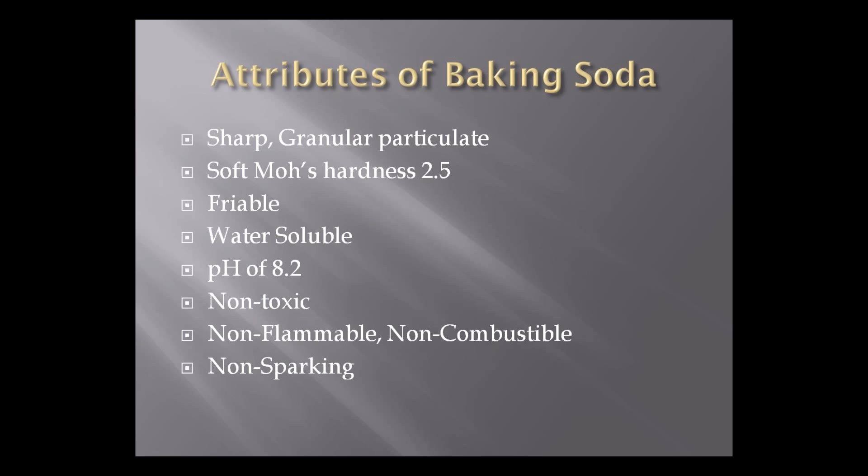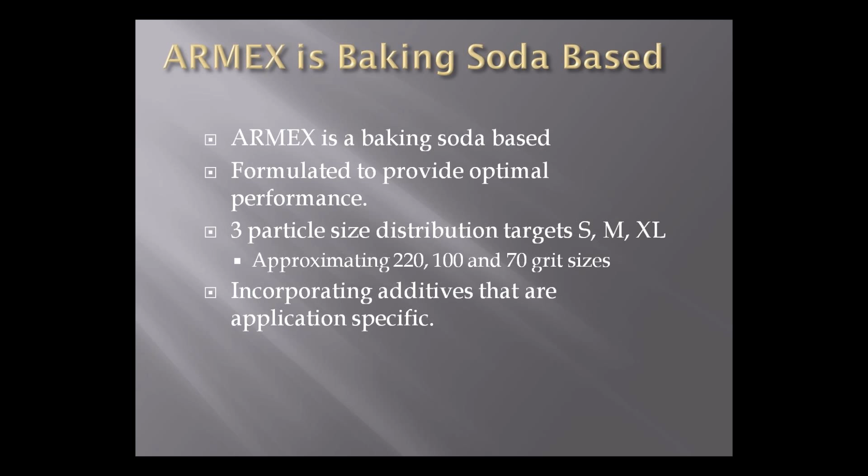We've taken this wonderfully natural particulate and enhanced it for performance as a cleaning and coating removal abrasive, being used in either a compressed air or a water delivery system. So Armex is baking soda. It's chemically very similar to the product that you find in the little yellow box, Arm & Hammer baking soda, in a supermarket. But because we are relying on its physical properties more so than its chemical properties, we have a tighter specification on particle size distribution, and we've added other ingredients to optimize its natural properties for specific applications.

All of our products have flow aids and moisture control aids. This minimizes any issues you would have with moisture during blasting. One flow aid makes the bicarbonate 2 times more resistant to moisture than regular baking soda, and the other makes it 8 times more resistant. We add other ingredients to improve rinsability and grease cutting. Our profile and turbine formulas are blended with a hard grit at 10%. This gives the abrasive just a little bit of tooth, but not to the point where you will see damage or distortion on the base material.

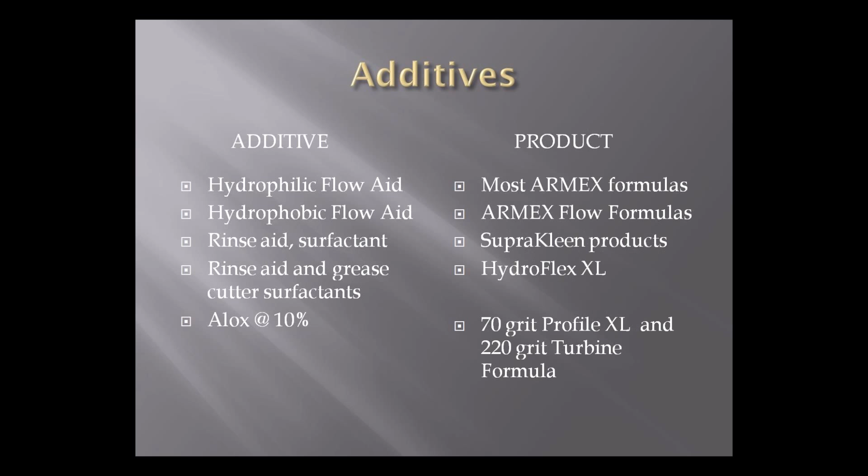Oops. Sorry about that.

The primary products of choice for the remanufacturers are Armex Maintenance XL product. This is a 270 micron or 70 grit abrasive with a hydrophilic flow aid, making it 2 times more resistant to moisture than regular baking soda. It's excellent for general cleaning and heavier paint removal. The Armex Maintenance formula is very much the same, except it's a slightly smaller particle, about 170 microns or 100 grit, and is best used on more gentle, sensitive substrates with thinner coatings.

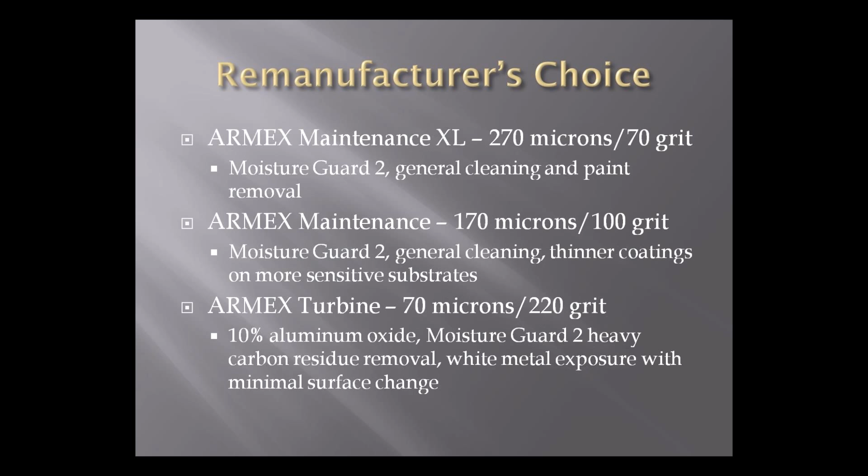The Armex turbine formula is a real departure from the rest of our formulations because it is blended with 10% aluminum oxide. It is a very, very fine grit, 70 microns or 220 grit, and it is excellent for removing heavy carbon residues and for exposing some white metal without surface damage. The hard abrasive allows for the deeper clean, but because it's only 10%, the soda actually cushions its impact, preserving the base metal, but still getting it very clean.

So now we've established that Armex is baking soda based, and as you can see here, in comparison to other abrasives, it is softer than most other grits available, and it is softer than most materials it would be used on.

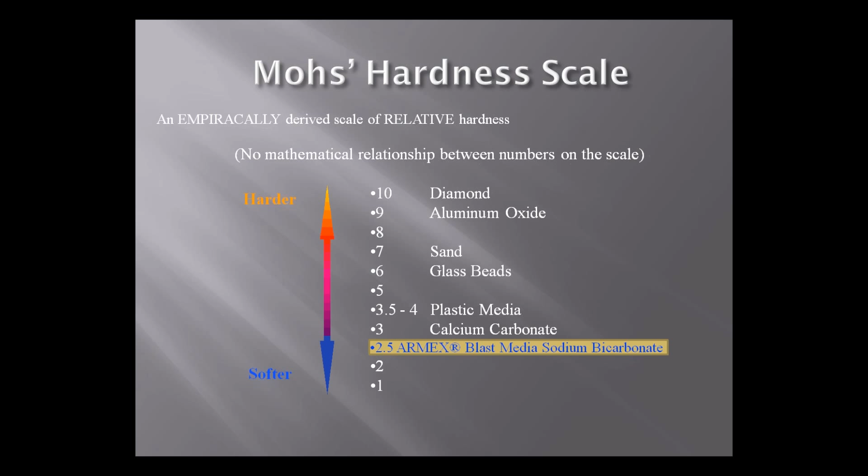How does it work? It is very soft, as we've established, and extremely friable, meaning that upon impact, it fractures into many more tiny particles. It is pulverized by the impact on the surface. Two phenomena result. The energy that is generated at this point is really the force that is removing the coating or contaminant, and then the particle is rendered to dust.

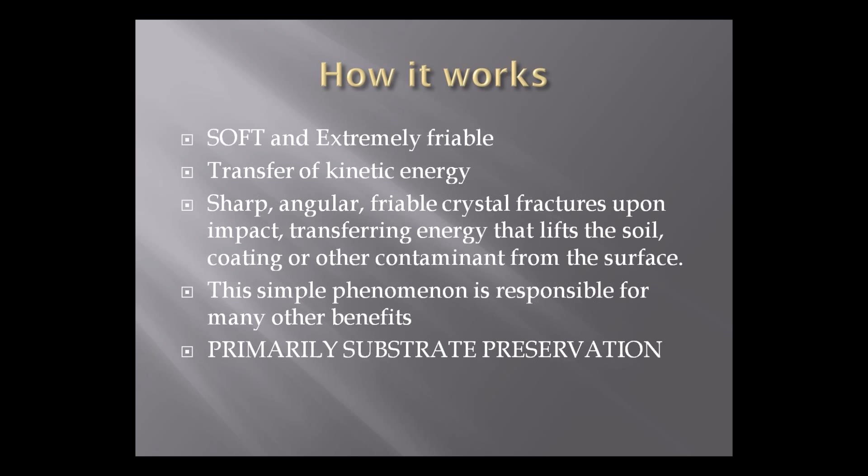This is one of the primary differences between Armex and other grits. Even grits considered friable like glass or plastic remain intact unless you're operating at pressures over 45 psi. We'll touch on that again later. Only then do they begin to fracture. Armex, on the other hand, fractures at even the lowest pressures, 5 or 10 psi. This is the key attribute that preserves the base material.

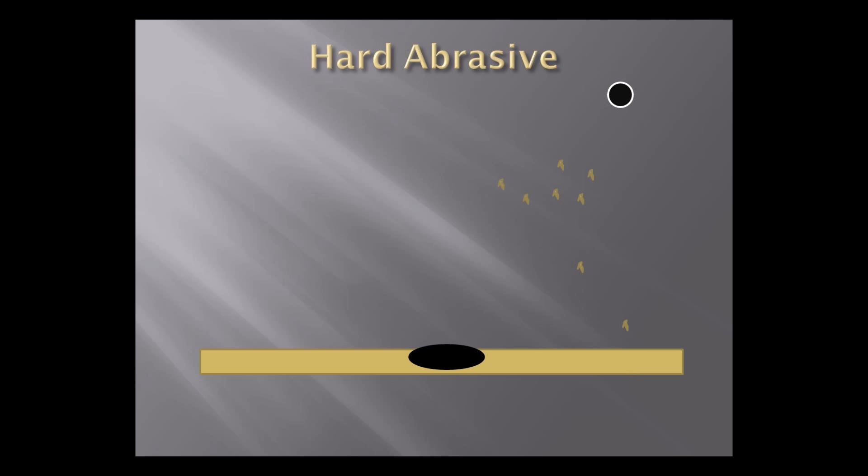In order to demonstrate the difference, let's take a look at this animation. The hard abrasive remains intact, strikes the surface, and removes the material, and may also remove the coating, and may also remove part of the base material. This might be as little as a scrape or a peen, but it could be as much as a pit. Armex, on the other hand, fractures upon impact, releasing all the energy, which removes the coating or contamination and leaves no damage to the base material.

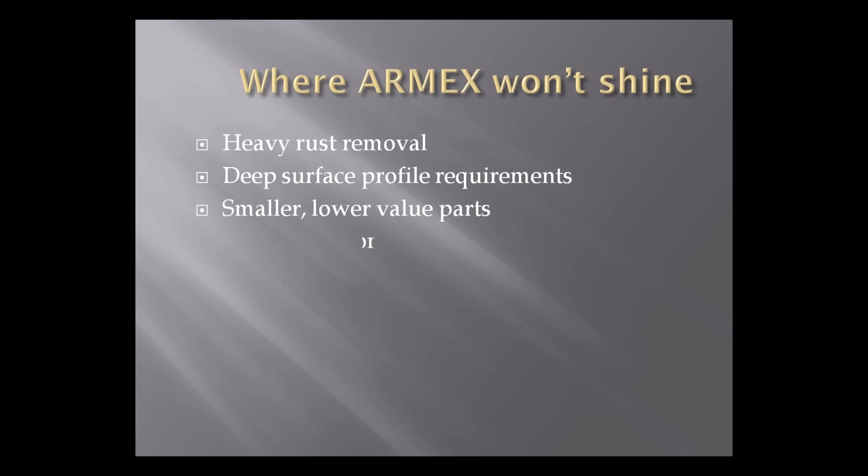Of course, there are some places where this would be a disadvantage. If you have very heavy rust removal requirements, or you need to create a deep surface profile, Armex would not be the best abrasive of choice. If you have many smaller or low value parts that can be cleaned in a batch process or a chemical bath, or if you have complex automation requirements, Armex may be difficult to adapt.

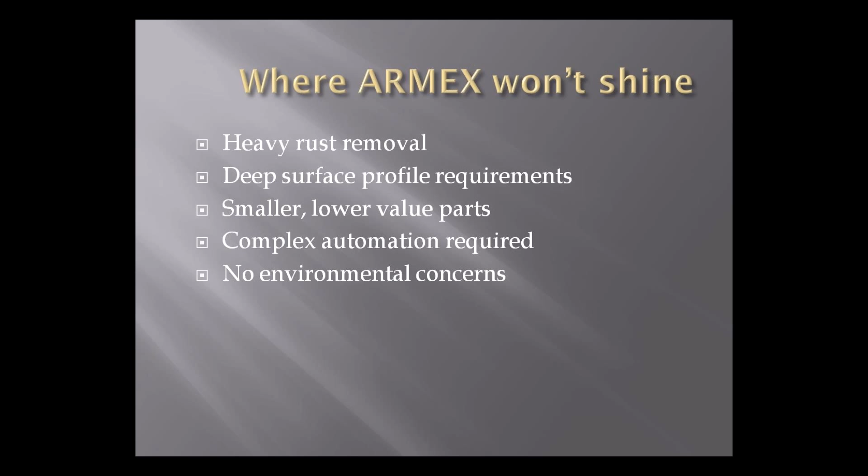It is a line-of-sight operation, so automation requires the use of multiple nozzles or moving nozzles, and certain geometries do not lend themselves well to that type of automation. Lastly, if you have no environmental concerns, but that of course would be the exception to the rule, especially in North America and somewhat globally at this point.

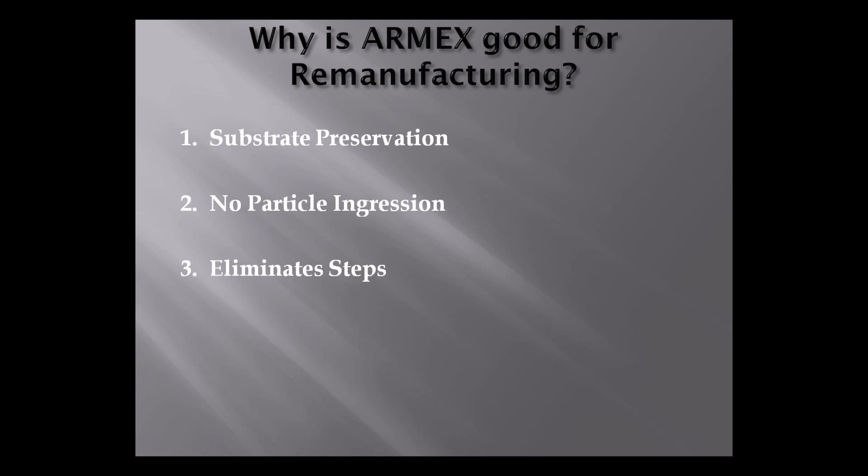Why is Armex good for remanufacturing? There are three primary reasons why Armex is good for use in remanufacturing. Substrate preservation, which we've already mentioned, no particle ingression, and the elimination of steps. We'll cover each of these.

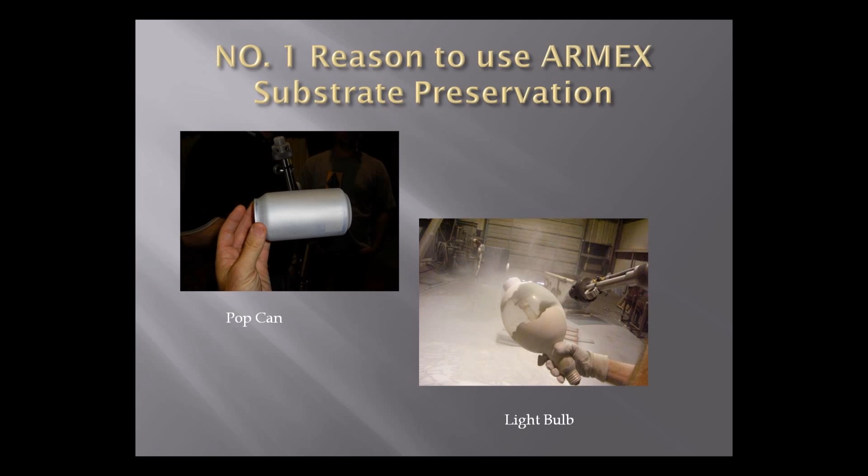While I know none of you are stripping pop cans or light bulbs, these photos do demonstrate how gentle yet effective Armex can be on sensitive substrates. This is becoming more and more important for engine remanufacturers as more and more components are being made from lighter materials, aluminum being just one.

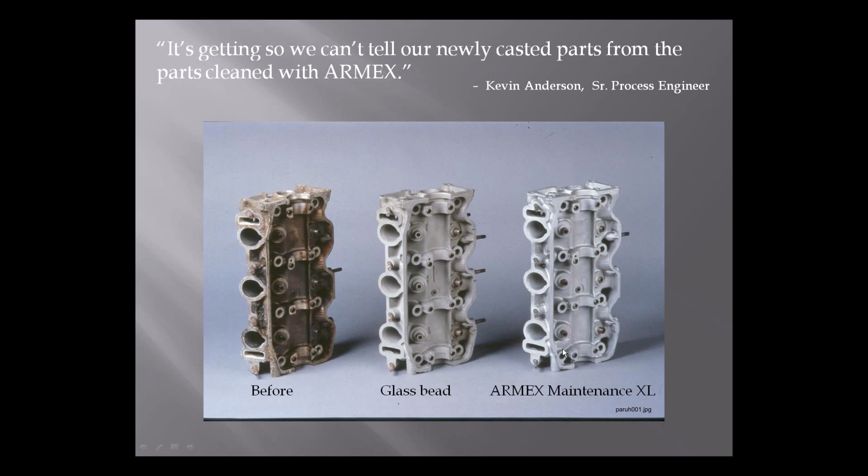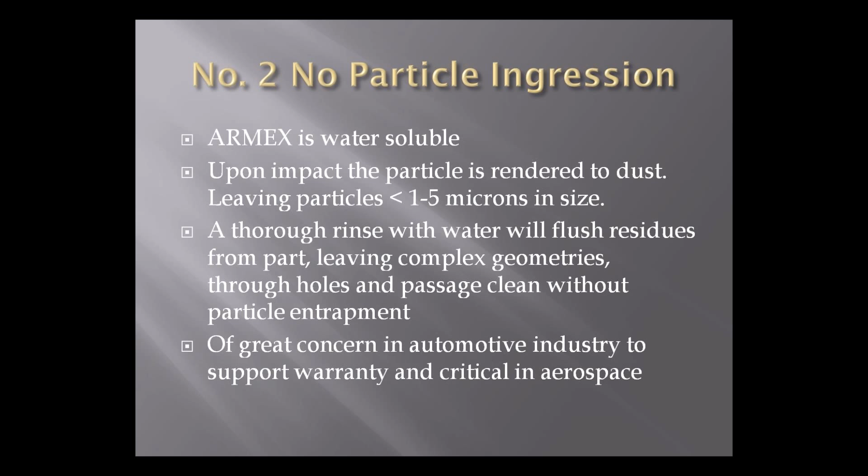The second reason that Armex is good for remanufacturers is that it's water soluble. I'm sorry. There's no particle ingression and it's water soluble. We've already demonstrated how it is rendered to dust, but this dust is water soluble. So when you rinse the surface of a particular part, all of the material and residues that are left in, regardless of contours and passageways, will be rinsed thoroughly through. This is also very important for NDT prep work.

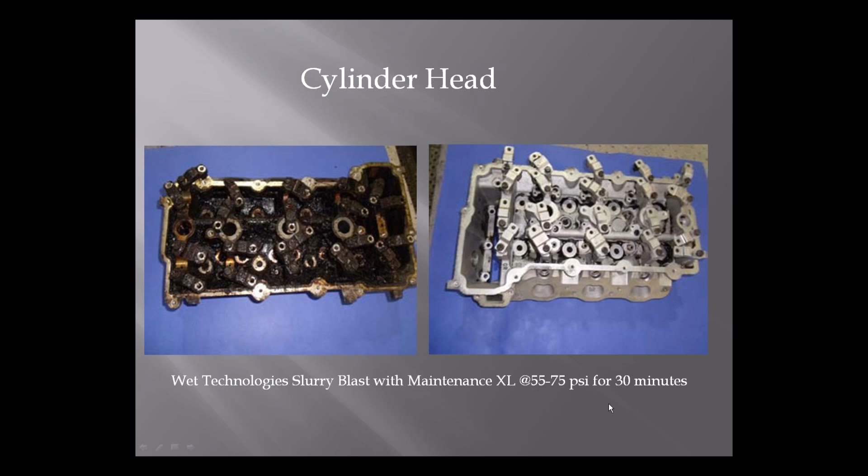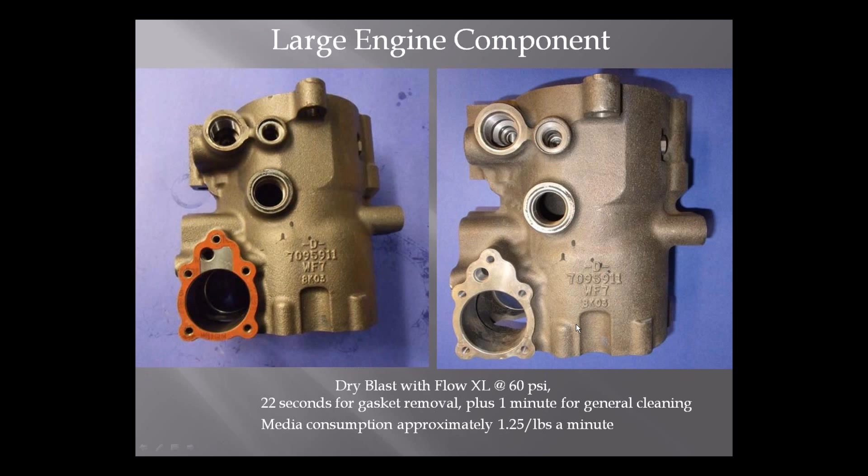The third reason you use Armex for remanufacturing, and the benefit, is that it can eliminate steps. If your process usually requires a pre-wash to remove contaminants before you move on to your abrasive step, you have to ask yourself why. Usually your pre-wash is to clean up the piece so you're not fouling your media. After all, you want to get as many turns out of a recyclable grit as you can. So you want to begin with something fairly clean. This usually adds a step, time, and chemical costs, not to mention disposal of those chemicals.

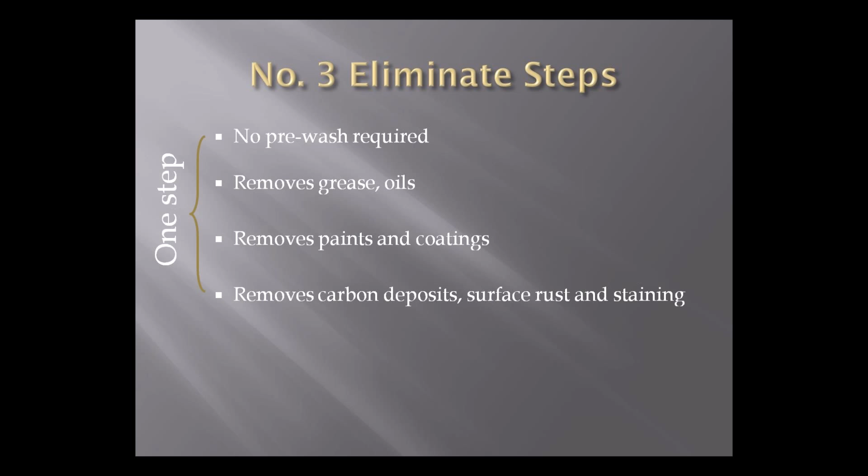In some cases, different processes are used to remove certain coatings or contaminants. So you might have one for grease and oil, one for carbon and paint, one for rust. Armex handles all of these contaminants in one step. You get the job done quickly with better results. Let's look at an example.

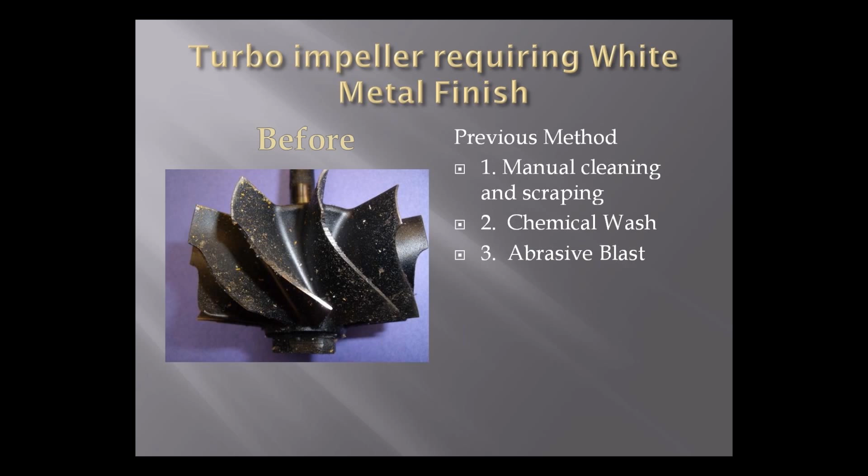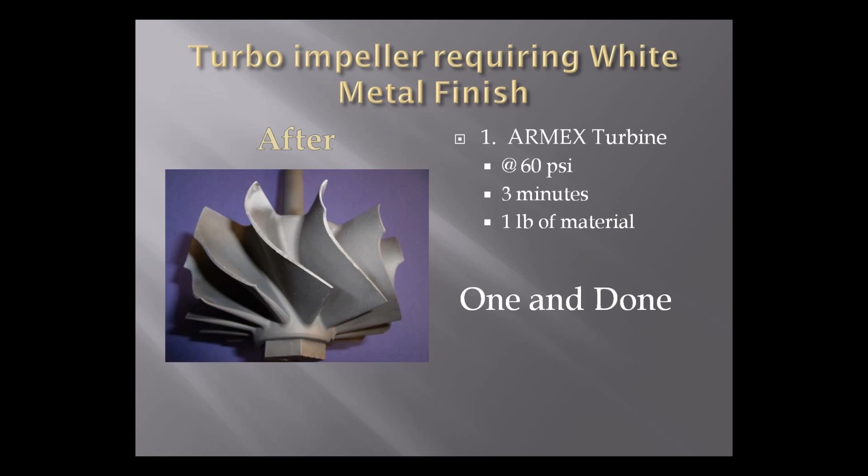This turbo impeller required a white metal finish. The previous method was to manually clean and scrape it, then put it through a chemical wash, and then finally into an abrasive blast. Armex, on the other hand, was able to handle this entire process in one step using the turbine formula. It took 3 minutes at 60 psi with 1 pound of material. One and done.

So, to review, Armex is baking soda based. It is a benign, non-hazardous, non-toxic abrasive, with benefits to the process, the workers, and the environment, requiring minimal waste handling. Most waste is usually classified as a non-haz industrial waste and could be sent to a sanitary landfill.

The value-added ingredients improve Armex's performance and are application-specific. All the products include a flow and moisture resistance, and others improve grease, oil, and carbon removal. Its soft and friable nature means there is no damage to the base material, protecting machine tolerances, screw threads, foundry stampings, and original profiles.

Also, this feature makes it an excellent tool for NDT testing in that it causes no pitting, peening, or crack closure. And finally, its water solubility allows for complete and thorough rinsing, so there are no particle ingression issues, no particulate left behind that can cause performance or warranty issues, or that require rigorous post-inspection and particulate removal steps.

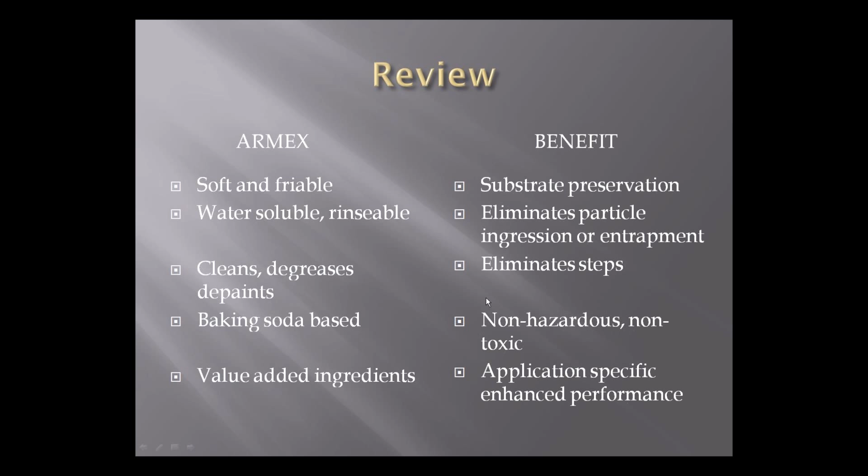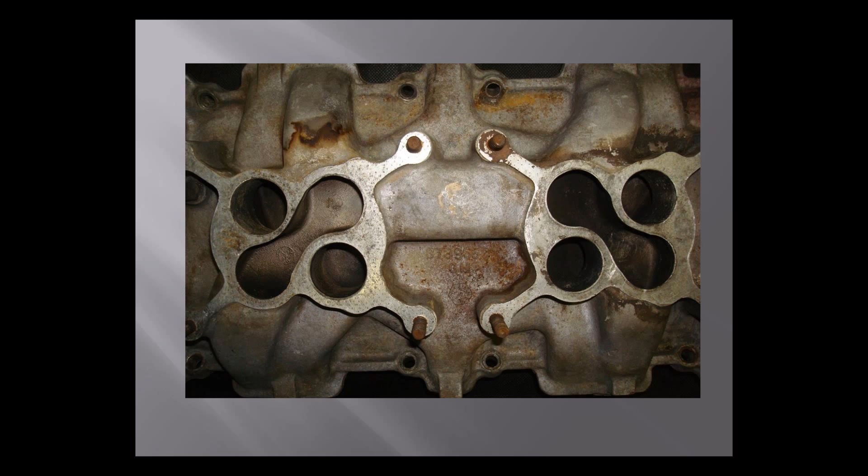How is it cost effective? One of the most misunderstood attributes of baking soda blasting is that it is a one-pass medium. It fractures so completely at any pressure from 10 psi to 110 psi that it cannot be recycled. So the question arises, how can it be cost effective? Most systems engineered to run soda operate efficiently with a very low flow of material, usually between a half a pound to a pound a minute.

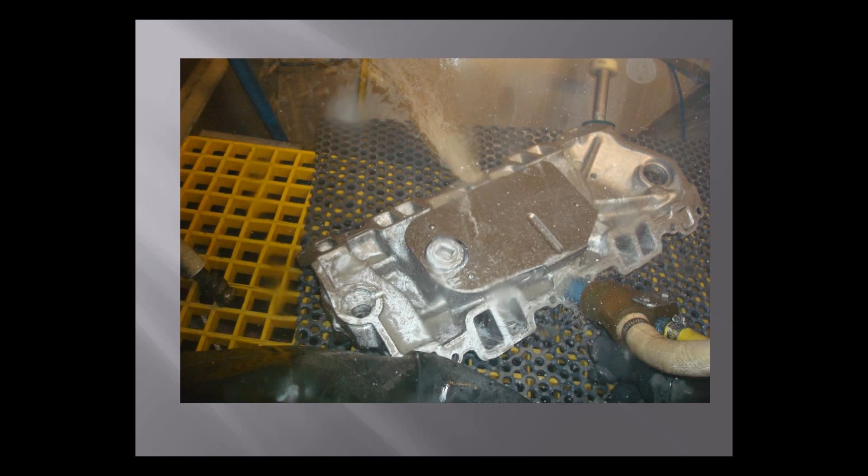So minimal consumption is important, not only to operational costs, but also to performance. Each particle needs to do its job. That said, if you have a very tenacious soil and need to increase pressures in order to deal with it more aggressively, you're not at risk of losing your recyclability, nor are you at risk of increasing damage. You can get the job done faster and better.

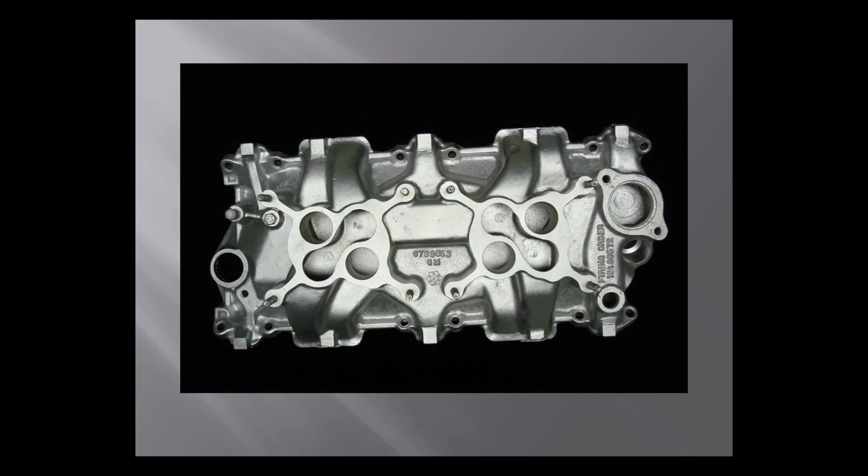With recyclable media, particularly glass or plastic, consumption is usually higher. And though you have the benefit of recycling, this benefit is lost when you operate at pressures over 45 psi. In the same scenario, with a more tenacious soil, you may be forced to dwell longer to maintain recyclability, which increases both your material and your labor costs and increases production time.

If you choose to increase pressures, production may increase, but you lose the recycling factor, subsequently increasing your material costs. Because glass and plastic and other goods are harder than soda, you also increase the risk of damage with increased pressure.

So to recap on the benefits of a one-pass media, if you look at glass and plastic, which are harder, with hardnesses of 3 and above, they are recyclable up to 45 psi. They do require a pre-cleaning step. They also run the risk of reintroducing contamination due to being recycled and driving some of that contamination deeper into surfaces. With increased pressures for increased production, you lose or decrease recyclability, and you also increase the risk of damage. These cost time and money, and they do require operator expertise.

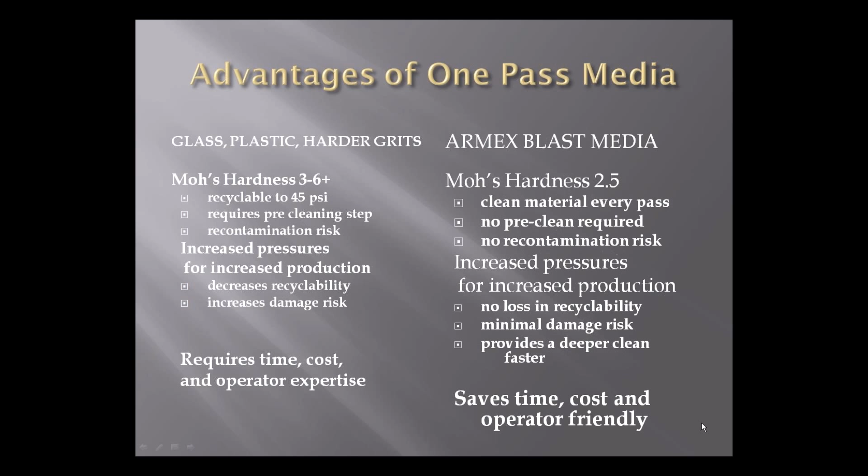The water solubility is part of this. When you look at plastic and glass, you are at risk of particle ingression. That often requires a pre-step where you use barriers like tape or douse to prevent particles from ingressing into sensitive areas. You still run the risk of entrapment, and you have to have a rigorous post-inspection step to be sure that no particles have been trapped in critical areas.

With regards to NDT testing, harder abrasives do cause pitting, peening at worst, and crack closure. All of these require time, cost, and operator expertise to manage. The Armex blast media, on the other hand, is water soluble. All the particulate is eliminated with a water rinse.

Even the particulate of the product, the turbine formula, that is at 10% 220 grit aluminum oxide, has been found to flush completely out of systems due to the fact that 90% of the material is water soluble. When this is flushed out, the fine particulate at 10% is dragged along with it. With regard to NDT testing, there's no pitting, peening risk, and no crack closure. All of this saves your operator time, money, and it's operator friendly.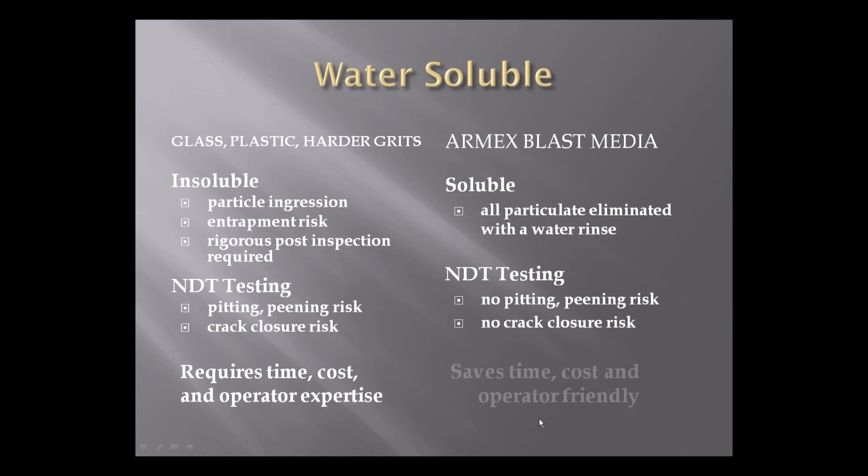There are other benefits as well to using Armex because of its benign and water-soluble nature. You can use it in both wet and dry systems. Your waste can be either a dry waste or a liquid waste. If you leave a residue of the material on steel surfaces, due to its alkaline pH it will act as a natural rust inhibitor before you move on to your next step.

Often, because of the benign nature of baking soda, your waste will test out as non-haz industrial waste and can be easily packaged for disposal at a sanitary landfill. The other interesting benefit is if facilities have their own wastewater treatment, Armex can act as a buffer in on-site wastewater treatment processes. So you can save on your buffering chemicals.

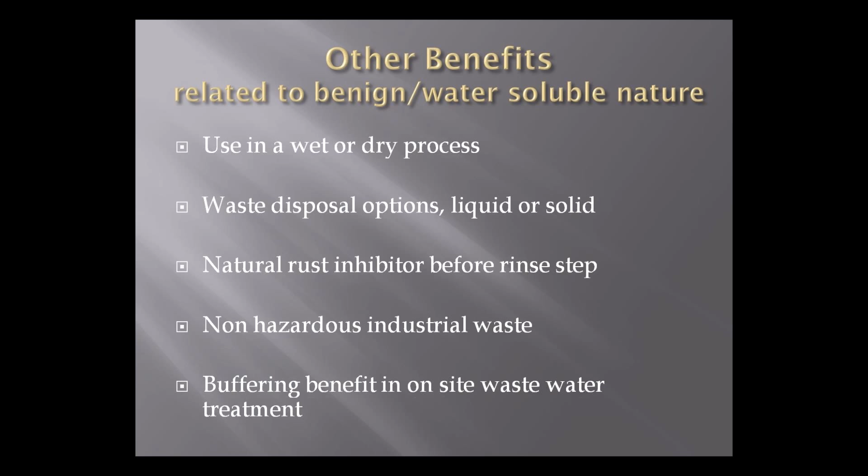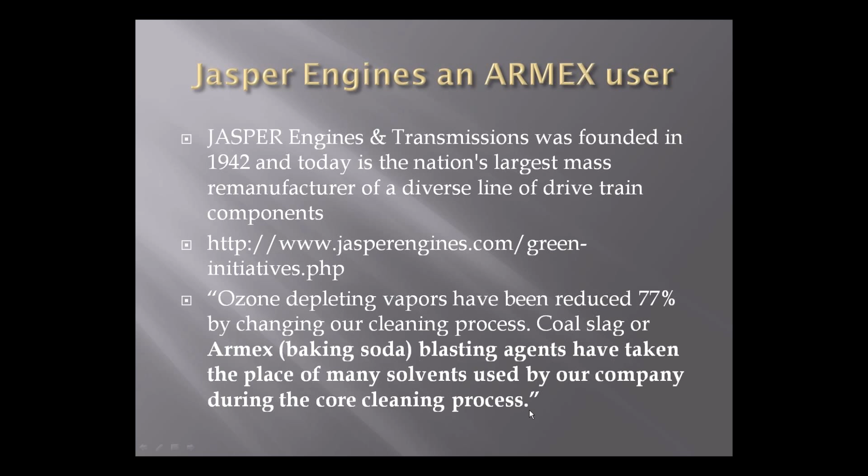Jasper Engines is one of the largest single consumers of Armex for engine component part cleaning. This is taken directly from Jasper Engines' website on green initiatives: Ozone depleting vapors have been reduced 77% by changing our cleaning process. Coal slag or Armex blasting agents have taken the place of many solvents used by our company during the core cleaning process. Armex is user-friendly, environmentally friendly, economical, and effective.

To give an example further of its cost effectiveness, we look at some actual end user results. This particular customer began using Armex way back in 1997, one of our first entrances into the remanufacturing market segment. They originally had a process that was 13 to 15 steps. We were able to reduce that to 8 steps. And as a result, they not only reduced their costs for labor, utilities, and chemicals, but they were also able to improve their throughput.

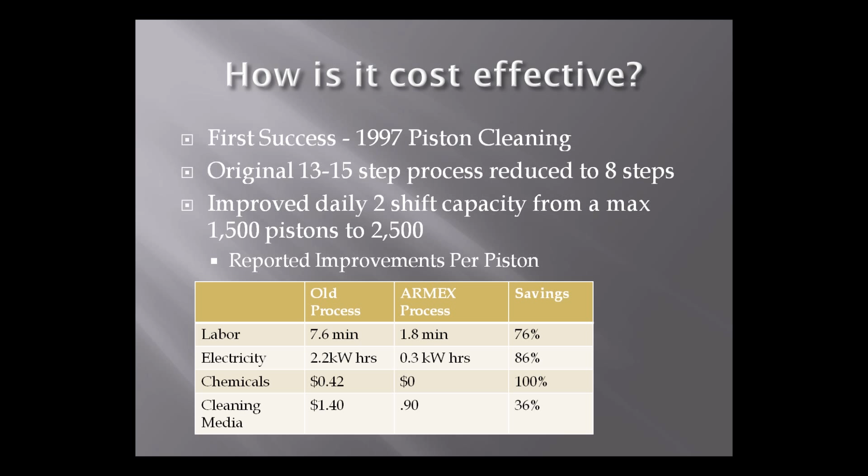Another core cleaning customer began using Armex this past year and has improved their throughput because of the predictable nature of their clean. Previously, they had a 4-step process, which was reduced to a 2-step process. The time to clean using washing, high-pressure washing and hand grinding had a lot of variability. Sometimes it'd take 10 minutes to 45 minutes. With Armex, the results were far more predictable for a 15-20-minute turnaround. Therefore, they were able to increase their throughput.

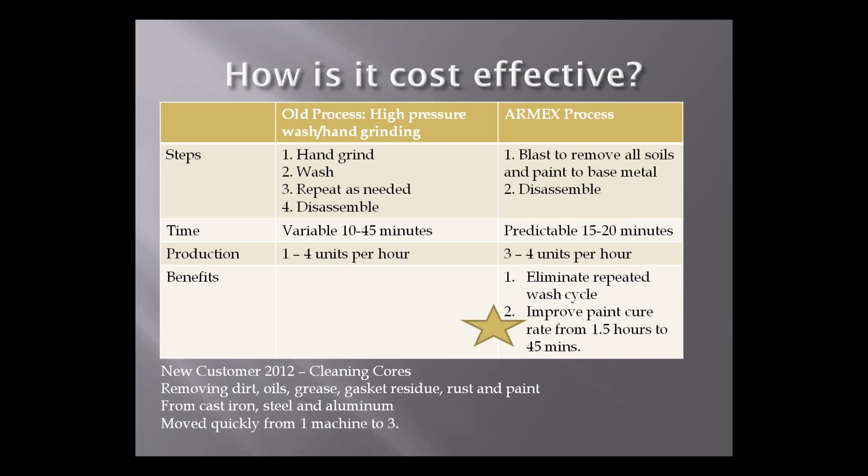The other thing they noticed was that they also improved their paint cure rate from 1.5 hours to 45 minutes. This phenomenon is being investigated further, but we believe it is due to the intense level of clean achieved before the paint application, and that there was no change to the original profile. So there were not deeper valleys and peaks which would prolong the cure rate. This customer was so convinced of their ROI that they purchased 2 additional machines shortly after they installed their first.

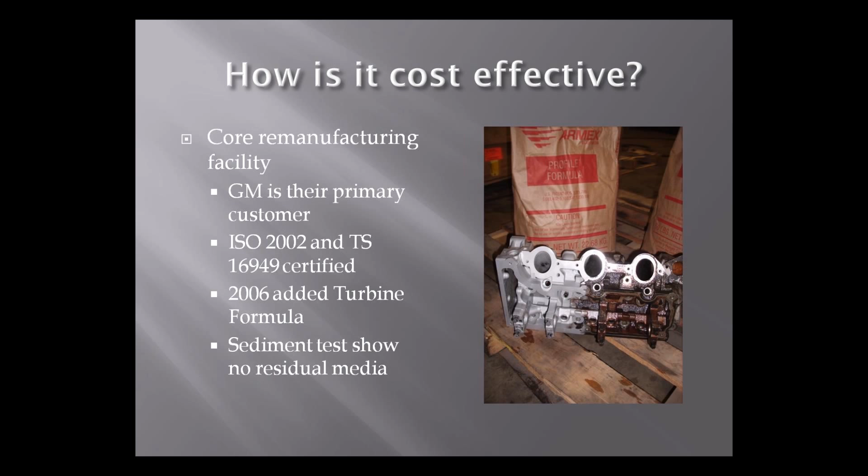Another end user began using this process back in '98, and in 2006 they switched to the turbine formula. That is the formula that, once again, we spoke about that has the aluminum oxide in it. Their sediment tests show that there's absolutely no residue remaining.

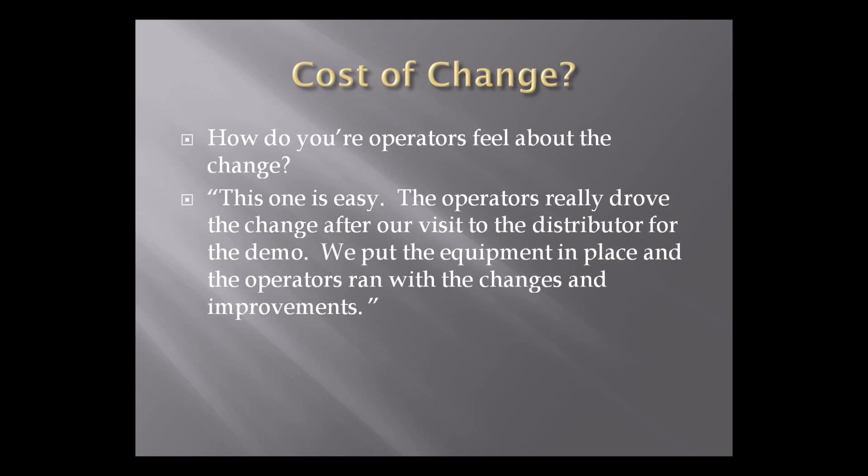The other element to be considered with the cost of change is what your operators are going to think. And one of our end users remarked, "This one is easy. The operators really drove the change. After our visit to the distributor for the demo, we put the equipment in place and the operators ran with the changes and the improvements."

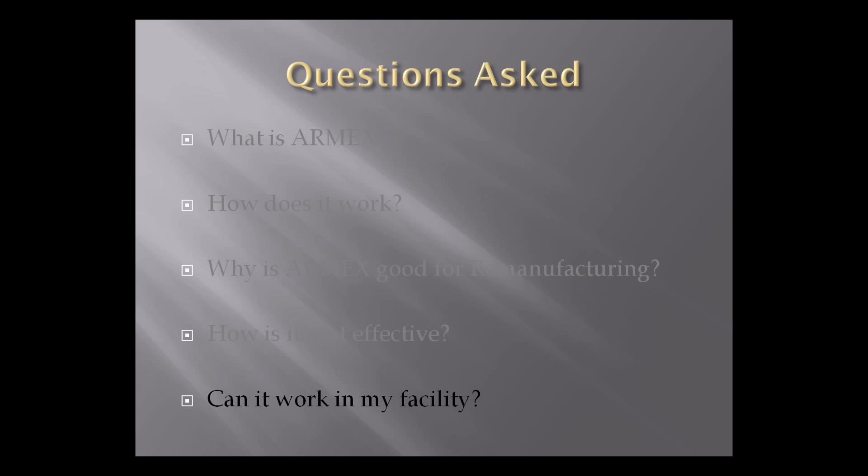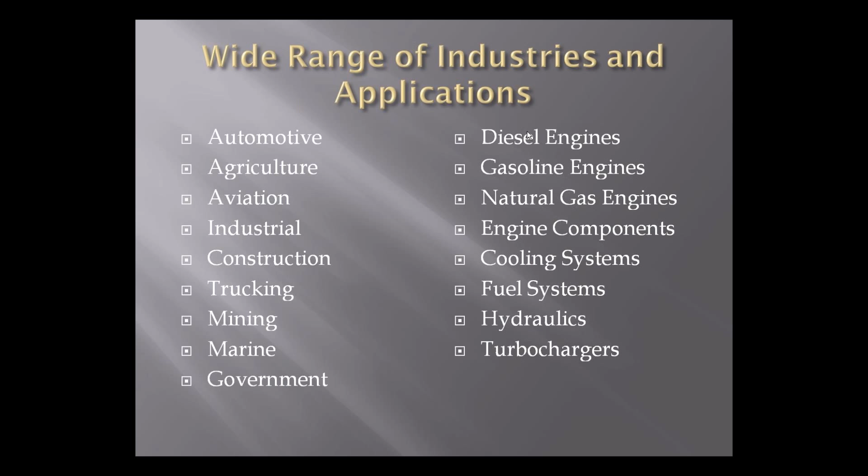So now that you've seen how it works, why it works well for remanufacturing, you may ask, can it work in my facility or for what I do? If you are involved in any of these industries for remanufacturing, and I'm sure you are, then Armex can work for you. Armex is being used to clean and prep many of these components, primarily the ones in black ink here. So if you're doing anything like this, you could effectively use the Armex blast media.

Here's an example of a diesel engine pump head, housing covers, and a valve stem cleaned with 100% soil removal in as little as 32 seconds to 3.10 minutes using the Armex maintenance formula. Again, that is the mid-range formula, which is about 100 grit.

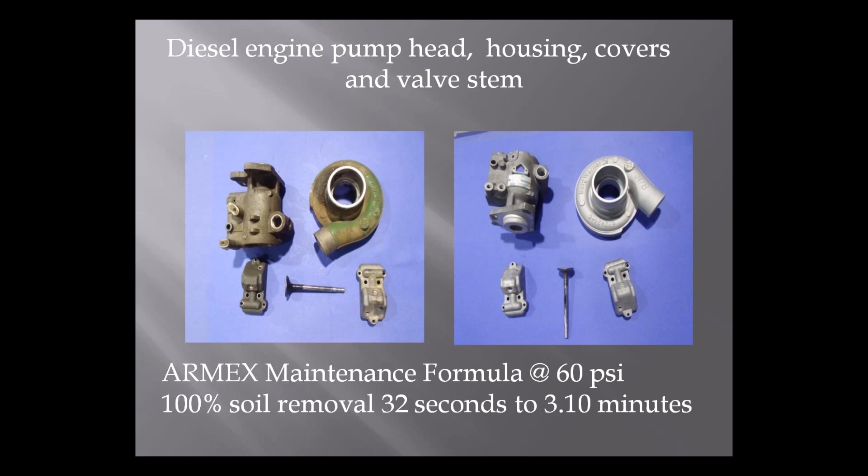These are some samples of parts we've done in our lab for a customer. On the left, the grease and paint was removed from the first piece. In the after photo, you can see that there's some residue on the surface. We've left this because it will inhibit flash rust while the part is transported back to the customer. All they need to do at that point is water rinse it, dry it, and then move on to the remaining step in the process.

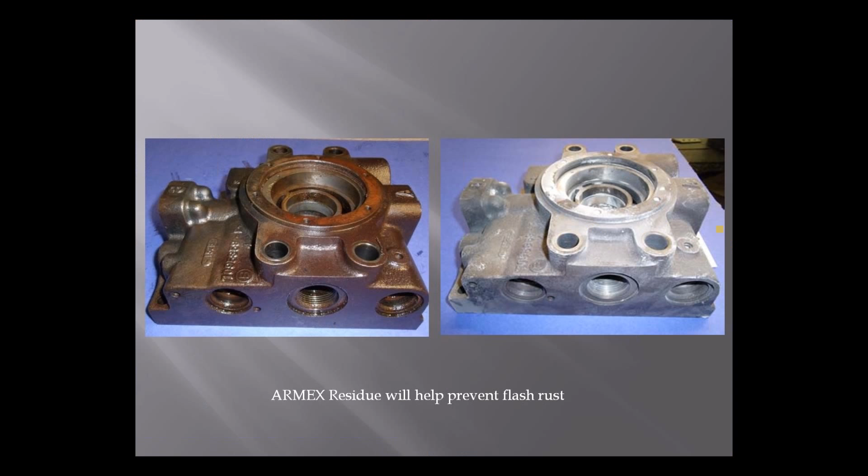The turbine formula that was used on the right gives just enough tooth to eliminate staining on the surface of this part. It's 90% water soluble, and so when it is rinsed, most of the material is water soluble and the remainder is dragged out with the rinse. Here's another example of a before and after with the residue left on to prevent flash rust.

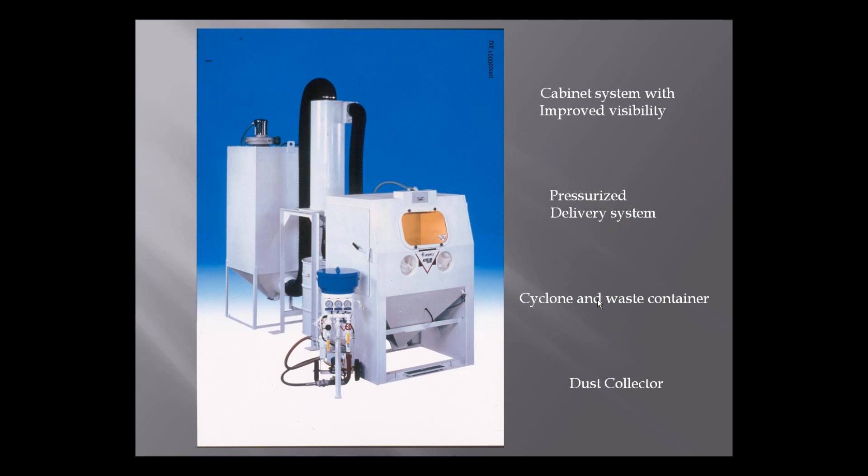So these are the items that can be cleaned using Armex. What is the equipment required? It's often asked if Armex can be used in existing equipment. The best answer for that is no. Recycling abrasive systems have some disadvantage in using Armex because Armex is not recyclable.

One of the requirements for blasting with soda is certainly a unique pressurized delivery system made to deliver soda with minimal flow rates, as we mentioned, from a half a pound to a pound a minute. The other is to have improved airflow through the cabinet box and improved visibility through the windshield to examine the workpiece. Conventional systems do end up getting too clogged with dust for the operator to see adequately. Many of the soda blast systems have airflow across this windshield to improve visibility.

The other item is the recycling. Because Armex is not recyclable, in recycling cabinets, it would bypass the cyclone and go directly to the dust collector, causing the dust collector to clog prematurely. With the Armex systems, the cyclone disposes of 95 to 99% of the waste and particulate and drops it into a container for disposal. In this case, it's a drum. It can be a bag or a tray, depending on the size and the throughput of the system. And lastly, you would have your dust collector for the very fine particulate. So there are some slight changes.

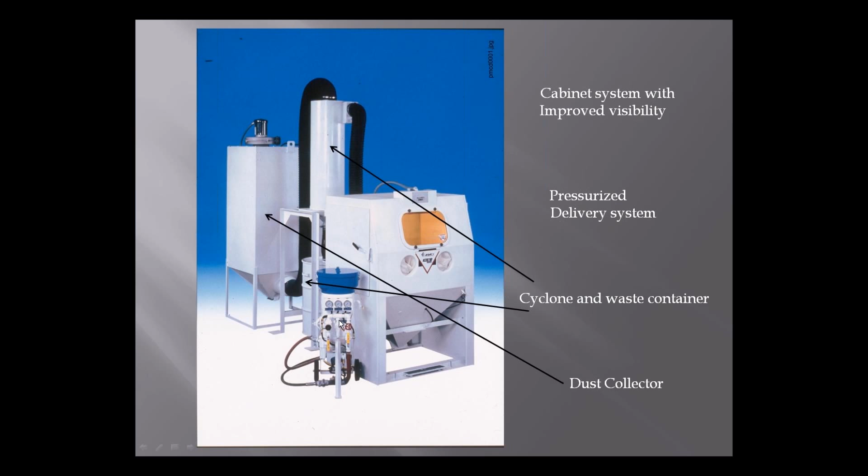With conventional blast equipment for recycling media, you would run into issues with performance. And while conventional systems will probably still be used, you'll still probably want to use glass or plastic for some operations. We suggest that you get a dedicated system for soda. This way you do not cause any cross-contamination and you have a dedicated system to handle your disposable abrasive.

We sell through a network of distributors in North America and worldwide. All of our distributors are well versed in the equipment options that are out there. They will work with you to determine which option is best for your application, for your budget, and for the space allotted for the equipment.

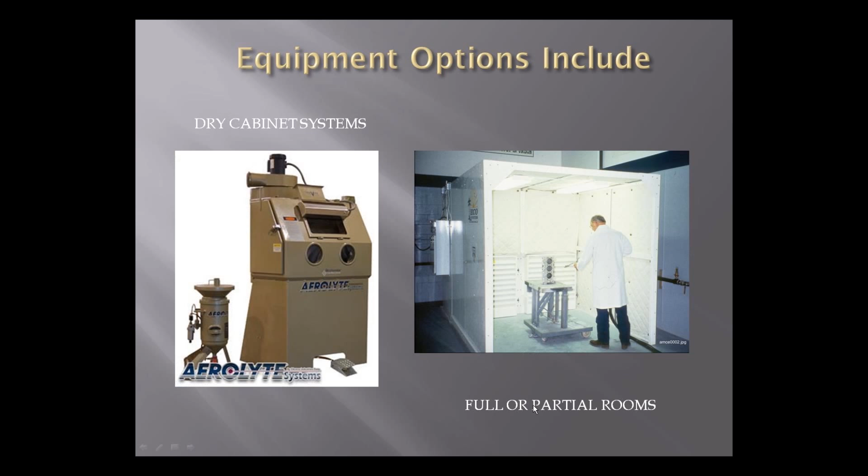On the left here is a dry blast cabinet by Clemco called the Bicarbonator. This is just one example of a contained blast cabinet. On the right is a partial room that can be built modularly to any depth or width, or you can have a fully contained room. Most of the distributors can advise you on what would work for your application.

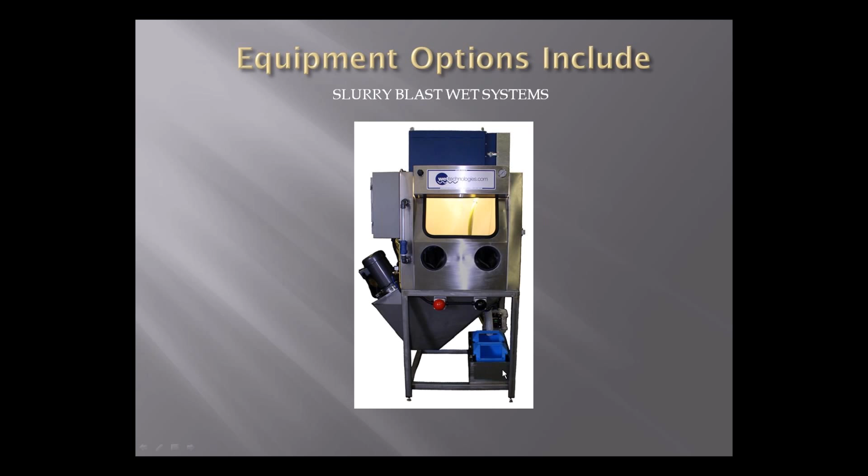Another option is a slurry blast cabinet. This cabinet is manufactured by Wet Technologies. The interesting thing about using Armex in a slurry blast cabinet is that you will be able to get a few turns of material, perhaps 2 to 3 turns. So there is some minimal recyclability when using the slurry blast cabinet. Whether you go wet or dry will depend on what your result requirements are.

I hope this presentation has given you an understanding of how baking soda blasting can work in your facility and some of the benefits, and that I've answered these questions. What is Armex? How does it work? Why is it good for remanufacturing? How cost effective is it, and can it work in my facility?